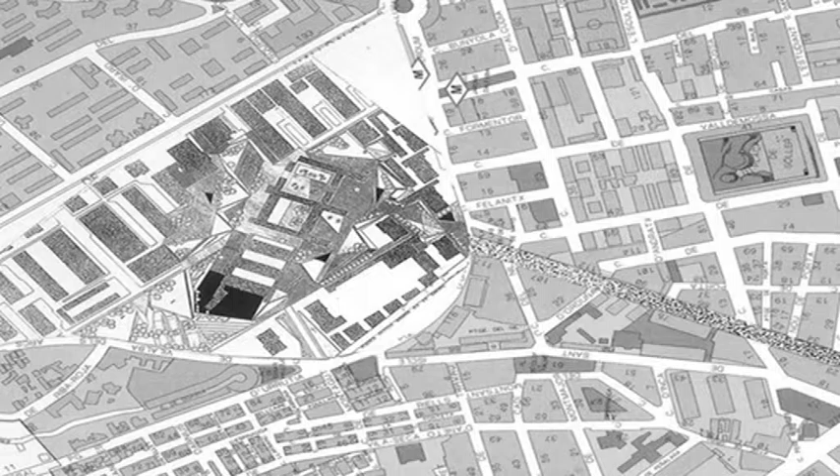So we are here. This is the Parc Central de Nou Barris, but there was an attempt of decentralization of the city. In the middle 80s, there was an interest in decentralizing the city into the neighborhoods. So they put the municipality of Nou Barris in this area, in an old psychiatric hospital that was here, in the middle of nowhere. And the intention was to create a civic center around the psychiatric hospital and put the municipal buildings, the services, the technical services, the main library, and amenities and housing around.

And then this was the Plaza Virrey Amat, that was the main plaza, where the roundabout, the metros, and the buses were. So there was an attempt of creating a center, Nou Barris Central, within the whole area of nine neighborhoods.

This was the main plaza that we also did within the competition. And these are a main plaza that tend to be more symbolic, and we made together this element.

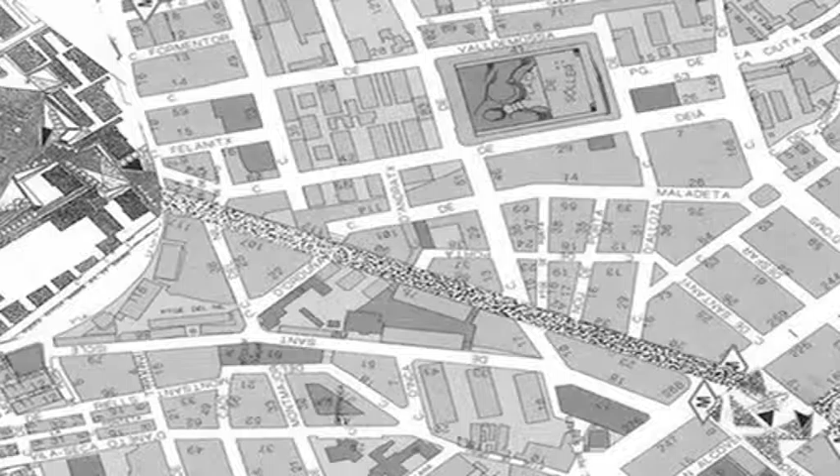But the connection to the north is like 700 meters, and the intention was to connect this plaza to the main area there. Only 700 meters, but completely disconnected, because there was nothing there. So these elements that we call palmas, diapason, tuning forks and palms, were placed in the plaza and in the other area to remind you, to recall you that there was something to go there.

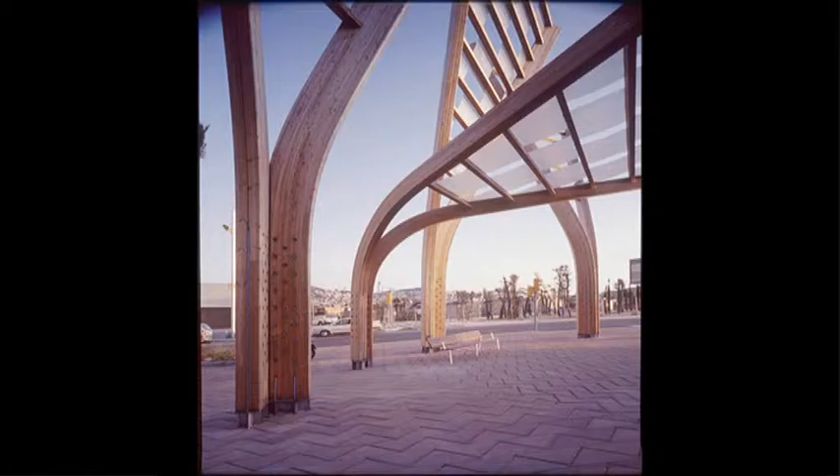And the technical services of the neighborhood arranged this. So these same signs are at the top of the Parc Central de Nou Barris, where the roundabout is.

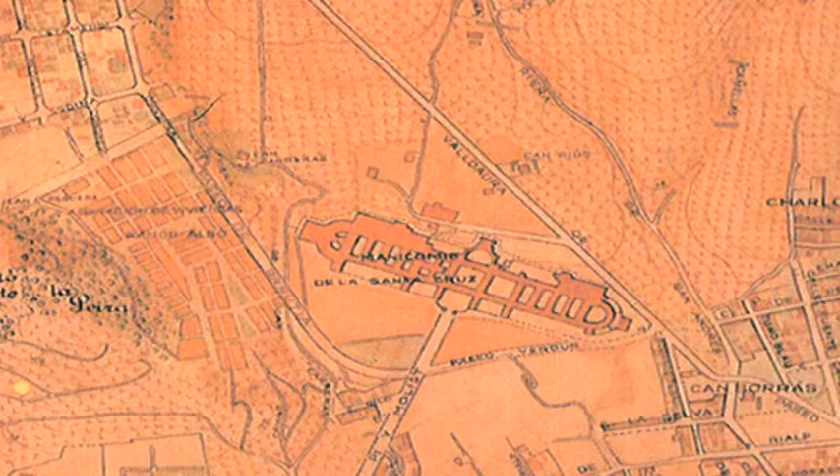This was a 1929 plan where you see the psychiatric building, like 500 meters of length by 100 meters of width, connected with the Plaza Virrey Amat with the main neoclassical arcs. And this is the Ronda and the Carrer Valldaura. So these were the lands around the psychiatric hospital, vineyards all over, not a lot of trees, and the main streets.

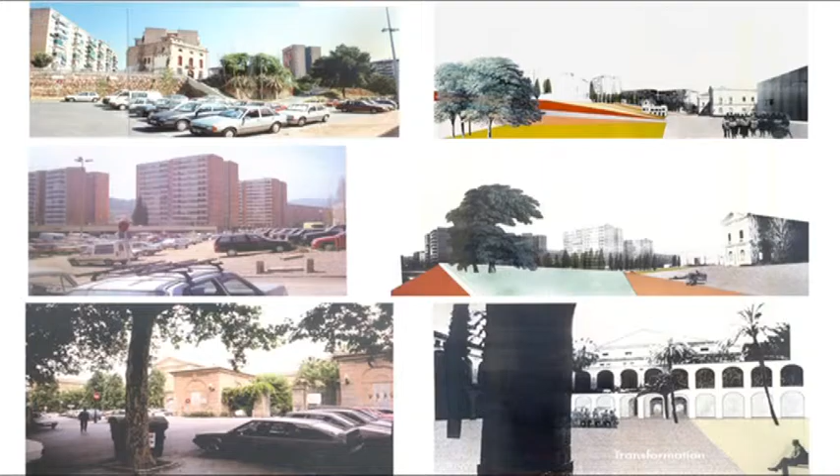This is the existing situation, and we were proposing to the team of that new municipality how these walls could be transformed into slopes, how these big buildings with parking lots around could have the parking placed down the street, and enlarge this plaza around the building. And how the main access to the city center could be put at level, in order to demolish these several courtyards that were hiding the building from the street, making an opening through the courtyard inside and a connection from one part to the other. So connection, connection, connection, putting at level relationship between buildings and plazas.

And why don't you speak? Do you want to speak about that?

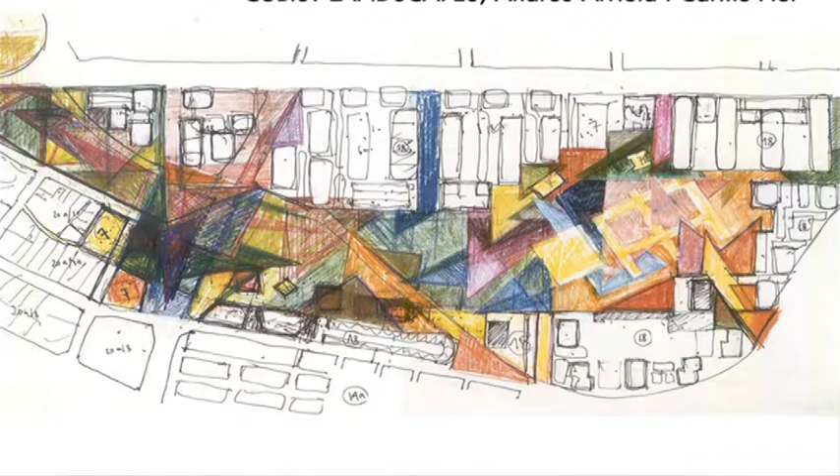Everything was the same. So we tried to do in our area, with these buildings and the open space, to treat them in the same way, because the shadows of the buildings were on top of the open space, and there was a lot of triangularization between the property of the blocks of residential housing and the exterior. So we had this idea, but not formally copying a painting, but conceptualizing the idea of using the triangle to adapt the smallest parts of the plan and make them together into a new area, a new landscape, let's say.

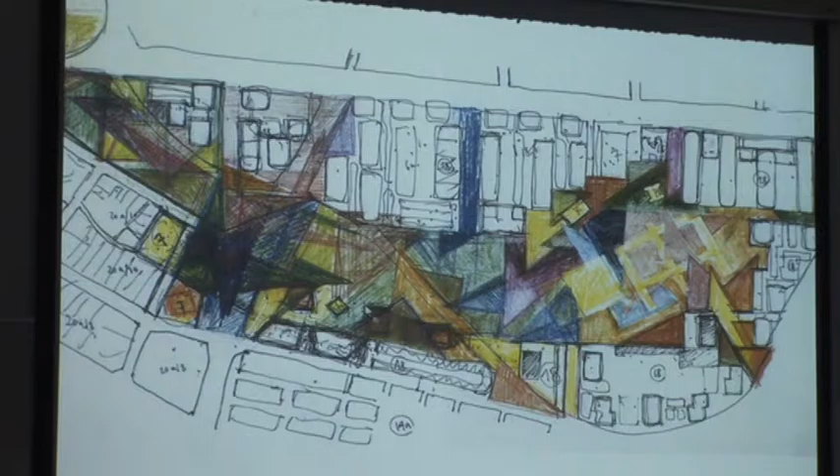And as here there was the main umbilical connection to the Plaza Virrey Amat, we tried to open a lot of different perspectives. So we tried to connect this inner part that was like inside of a castle with a big wall made by the residential buildings. We tried to open all these elements, all these streets, and have different visions of this landscape.

So here we had, you see, the remnant of the hospital and all these elements, and we tried to cut through and go upstairs.

Well, this also shows the position of the different amenities, because it was proposed to put a library here in the open space. We said no, it's better to place it up there. So in the beginning, it was just a question of tearing down parts of the main psychiatric building in order to put a plaza in front of the building.

And we produced a scheme that told the people in that area that even if you were doing some work, it would be non-crucial if you were not connecting all this space to the main area of the city where the new belt was, because you would always be marginal inside of a neighborhood, not explaining what is there, not facing the urban situation.

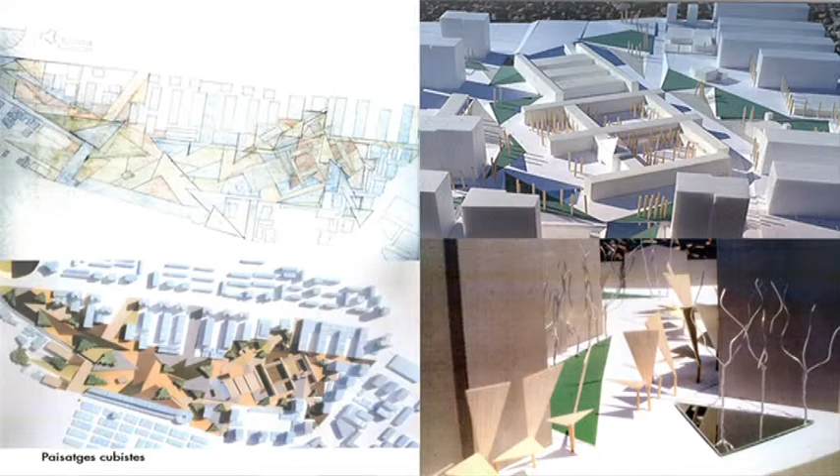So we tried that this kind of pavement, the pavement you would see there, is also a piece of triangle. We decided to use different colors of terrain, of ground, and make a differentiation of these triangles also within the pavement, because we had to put pavement apart from grass. And we studied how to do it three-dimensionally, to put this cubist landscape three-dimensionally and use it in urban design, how to treat all these elements.

From that, drawings, building models, and also trying to open this neoclassical street that was leading to the main plaza, to open it into different plazas and opening the trees, forming this plaza.

This is the main courtyard that was opened at level. Before there was like a neoclassical building, with stairs and closed off. We put it at level and we opened these areas.

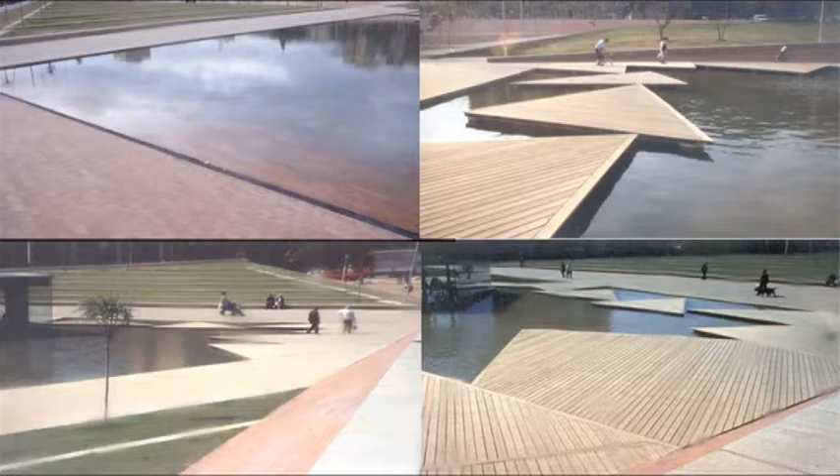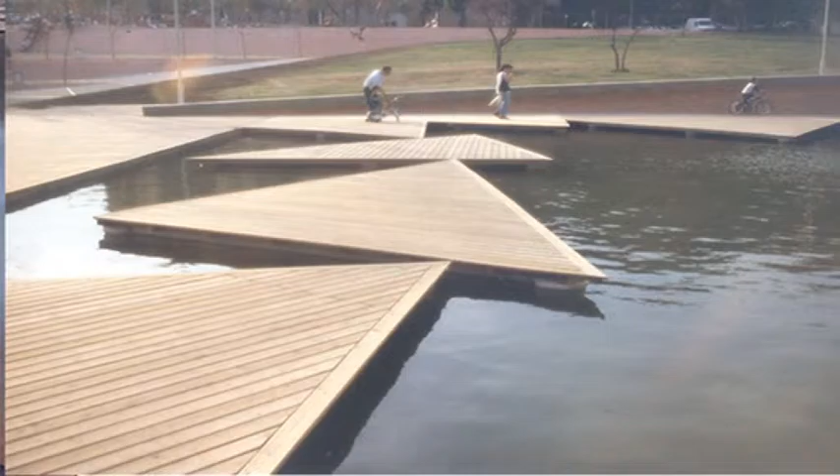This was the first phase of the park. Since municipality elections are every 4 years, the first municipal council did the first part of the park, which opened in 1999 or 2000. This is the first part.

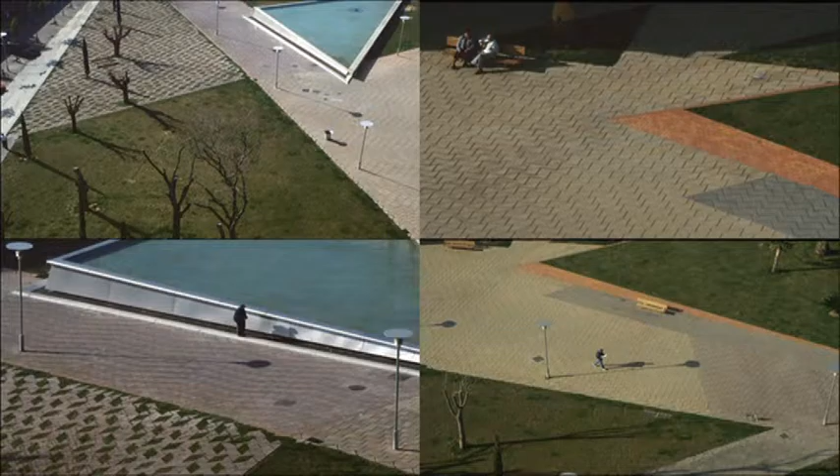In fact, it is a plaza, extending the plaza around the psychiatric building and leveling it. You see a lot of triangles here because it's a composition, but the scale is quite big. I've been there, and it's quite nice because it's a grand scale - a 16 hectare park.

The buildings around are high, so this kind of detailing doesn't seem like over-design. But this is to show you that from the small detail to the water elements, we were using the same kind of design, triangular shape.

In order not to lose this concept from the general idea of cubist landscape down to the detail, you had to keep very straight to a kind of language to cope with different phases, and also with the expropriation of housing, transforming different parts of the park.

This is part of the first area - the water. This area had been inhabited mostly by Andalusians, and there are a lot of fountains, Granada fountains, Arab fountains, and all that. So they asked us to put some fountains.

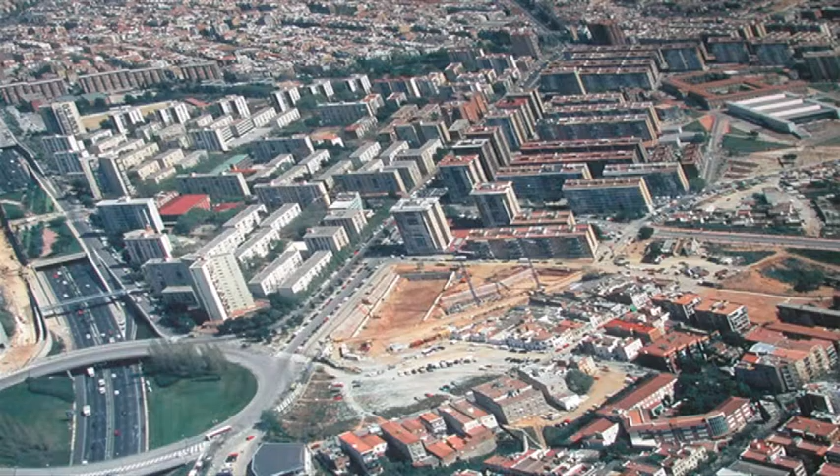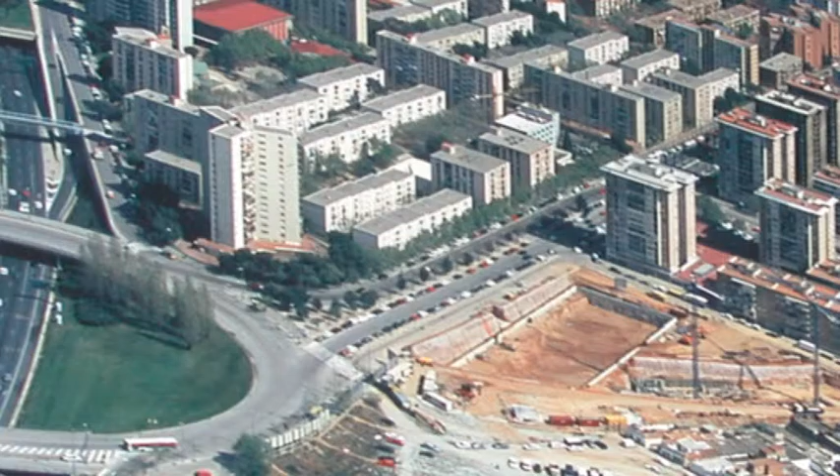This is the belt, already done in '92, and the new housing that was being built. You see how the scheme had to cope with the demolition of these buildings in the middle, because they were planned and fixed in the master plan as a park.

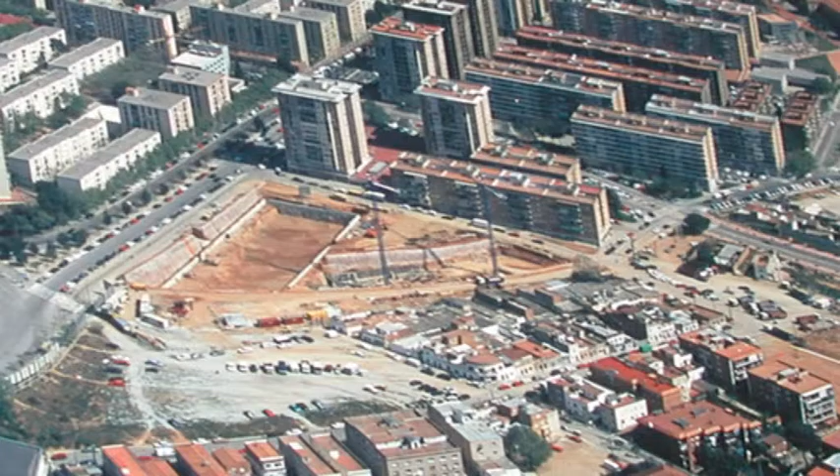The first phase of the park's idea was very triangular, because we had to connect a 7 meter difference in level, widening the space around the building. In the second part of the park, this big building was placed at 120 meters above sea level on a neoclassical platform, but the other part of the park was steep, with a 40 meter level difference.

So we had to invent a flexibilization of the triangle in order to wind and connect with the mountains and hills that were there. The space was also a little less, so we tried using scissors to make two different levels, putting more at grade with the housing in front - the triangular space of land - with a slope around 4% to be used as a flat area, like a garden, connected with this.

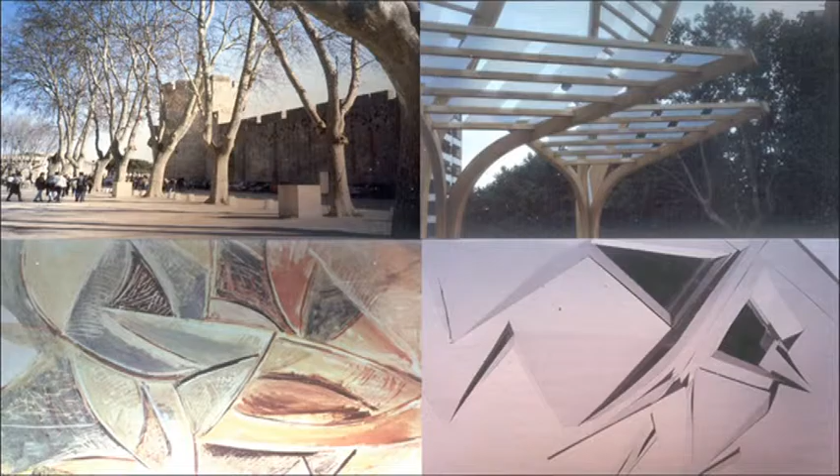So this is the inspiration of the palms and tuning forks. This is Aigües Mortes in the south of France, in Catalan, Aigües Mortes. And also this model that we were building for the next part of the park, the one that winds up until the hills.

I think paintings inspire you a lot, because artists are devoted to experiencing all these kinds of shapes connecting with sensation. So as architects or landscape architects, we have to cope with a lot of different things, functions and other things. So we don't have time to do that, so we take their investigations in order to use them in our 3-dimensional landscapes.

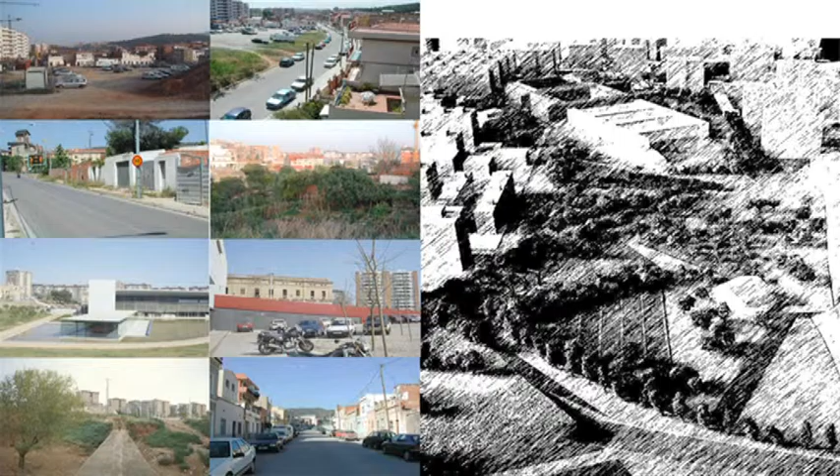So you see before and after, so what was segmentation, what is fragmentation, what are walls are transformed into slopes, in order to make this connection more fluent.

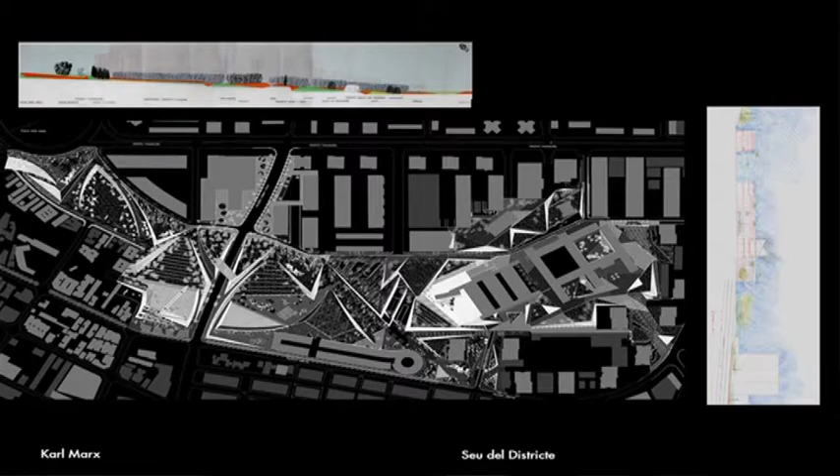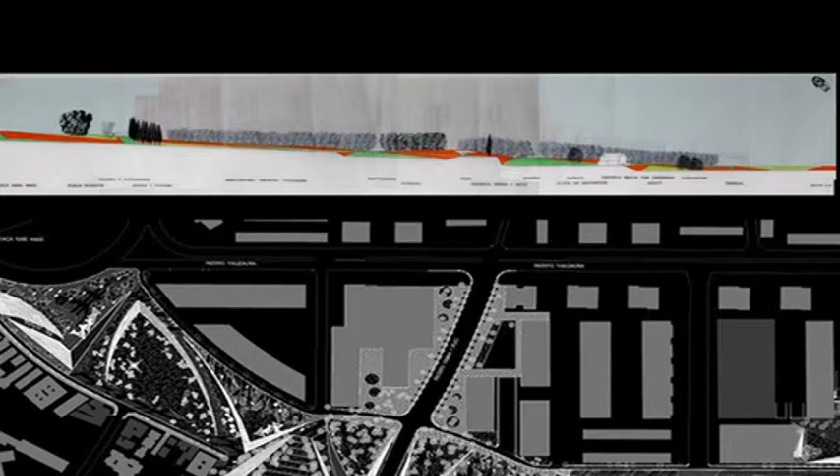You see here the cross-section, this urban axis. The idea was - these are drawings from Andreu, the ones before were mine - but this is this cut through the building in order to put at level and connect this axis. And the other one is the difference of levels and how to connect them.

We were saying topographical. I think topography is the most important thing in order to achieve this connectivity and put things at hand. So we studied carefully this topography, and also in order to see that the slope here is less than here.

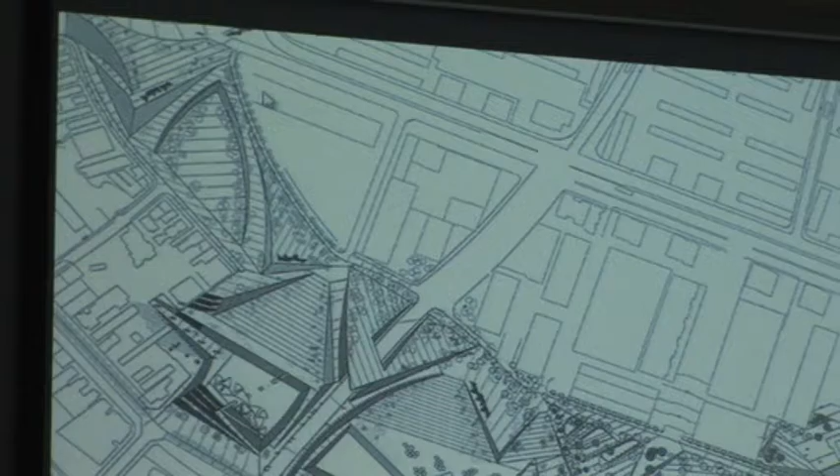And we were trying to use these slopes to make a plaza, a green area that faces these houses here. We put there, at the level of the roundabout, a plaza, because there wasn't one there. There was just a big slope facing this street. You would see later how to connect that from there.

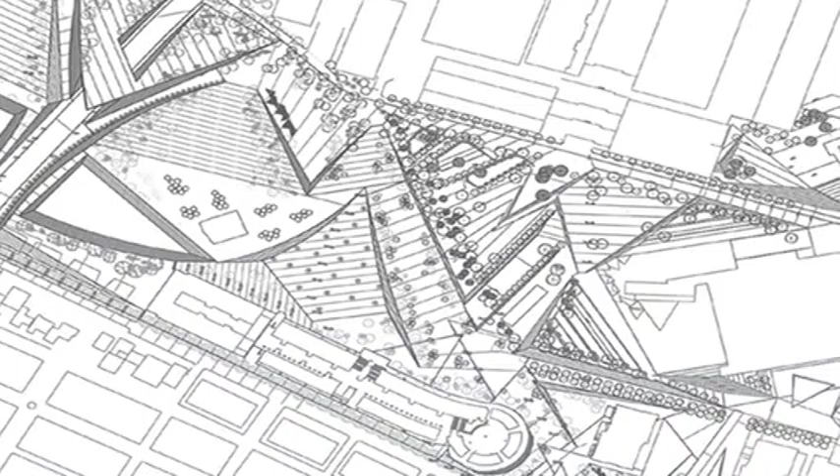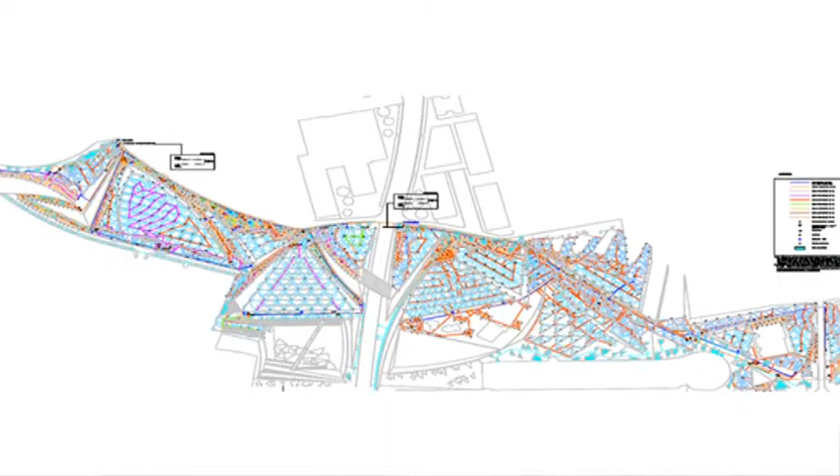So you see the organization of these triangles. I put that because this is the irrigation system of the whole area, of all these trees, bushes, and all that. I don't know how they put in all this kind of irrigation, but we were supposed to put that. And the areas - well, we don't see here because it enlarges a lot - but here there is an entrance from the city lake. These triangles of water are there.

And from the first phase of the park, you had this area. In the second phase of the park, we transformed this street into a rambla. This is the second part.

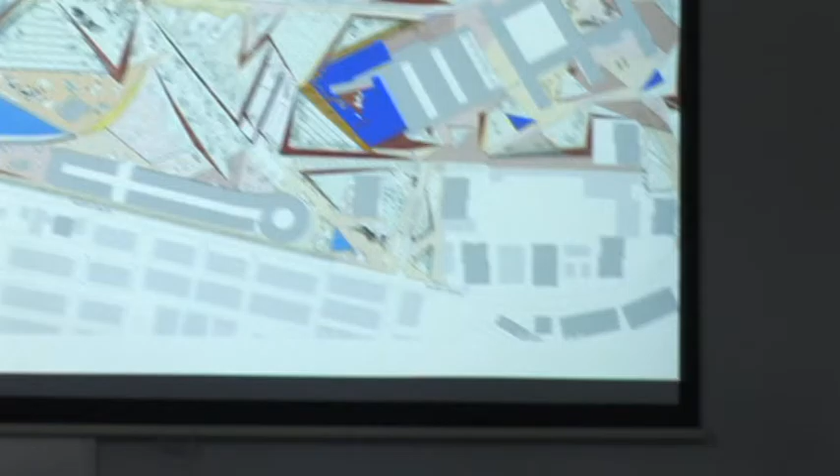Between one phase and the other, the politicians - we were discussing how to cross. This was a new street that would cross the park in half. We didn't want this street to cut the park in half because this idea of connecting this part to the roundabout and the motorway was important, in order not to be marginal and inside.

So we had been planning different ways of overpassing this element, a bridge or no bridge. But at the end, they hired an engineer, and he said, let's put a slope and a tube, and that's it. So this torrent that was there was completely cut, and we found this big barrier.

So we organized, with this idea of water, a lake on either side of this new street, and because of that you would see some play with fountains and elements trying to give memory of this element.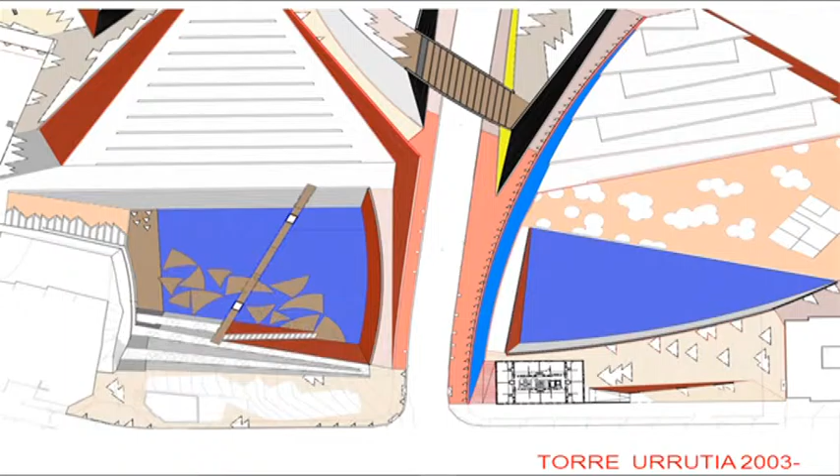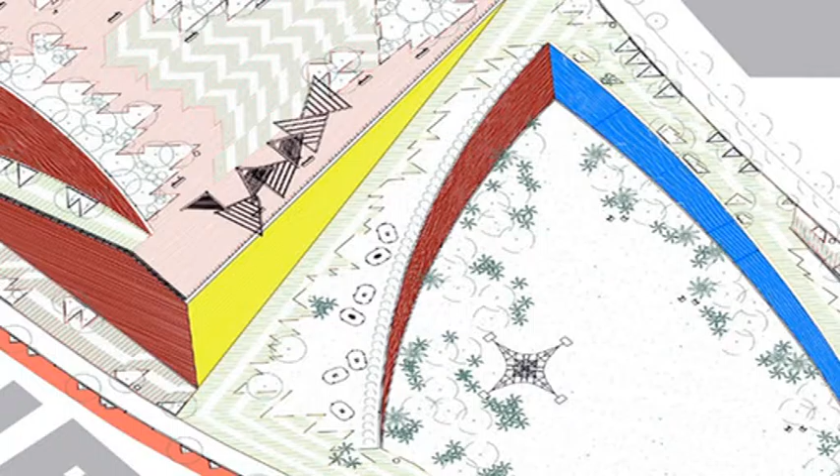The idea of the vegetation - this is a plaza about 100 meters, this is a slope, this is green, like an amphitheater. In every one of these plazas, the vegetation is different and is formed by two kinds of trees: one that is high because of the scale and is evergreen, and the other that contrasts with color and is not evergreen. It depends on the area.

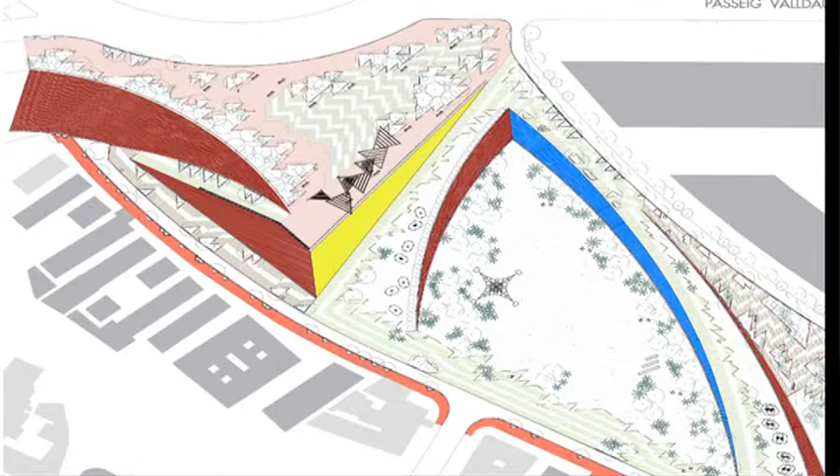It changes, there are a lot of different elements. You see there are three here, 3 olive trees. I placed 3 because, you know, after all this kind of urbanization, what happens is there is no money for plants - it has happened to me before. And I said, but if this is a park, why is there no money for plants? So I put a lot of them in so that, here we just have one olive tree now, but there are 3, okay? And all this kind of elements.

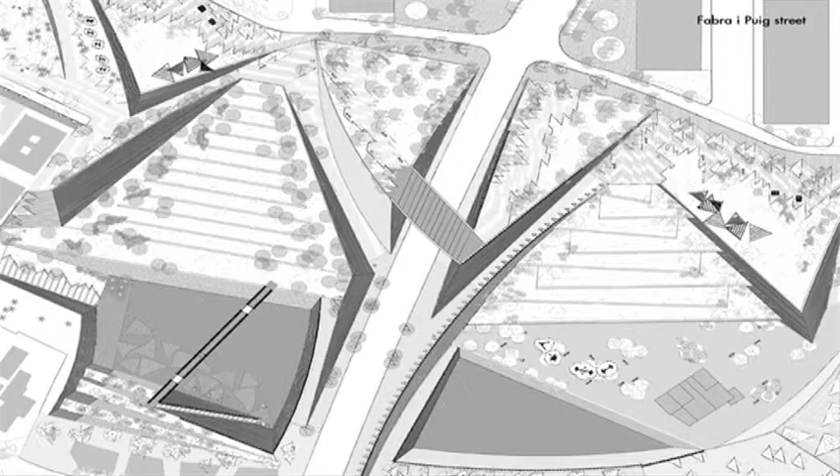These elements - there are interesting things, for example, because of the water systems and pump systems, we arranged falling water with 3 cascades there. But in the middle of the licitation of the project, they said, well, just one falling water. The water system and the street that passes by here, because as Carmen was saying, that was a long discussion on how to cross the park with this new street, because it was an important connection in terms of traffic.

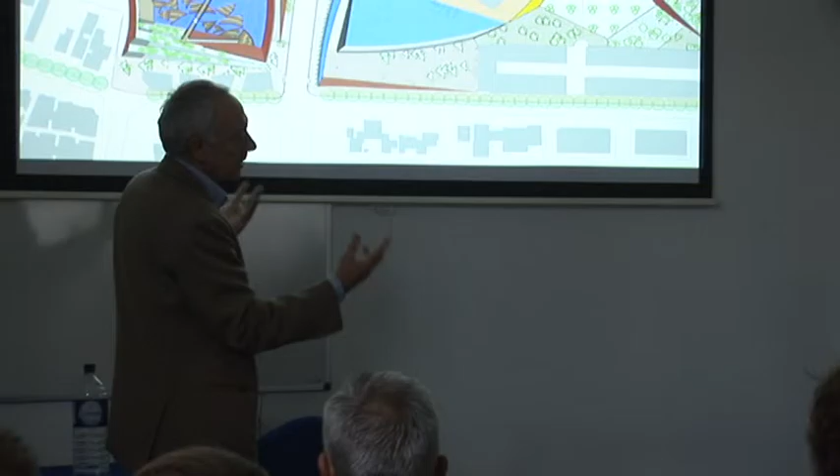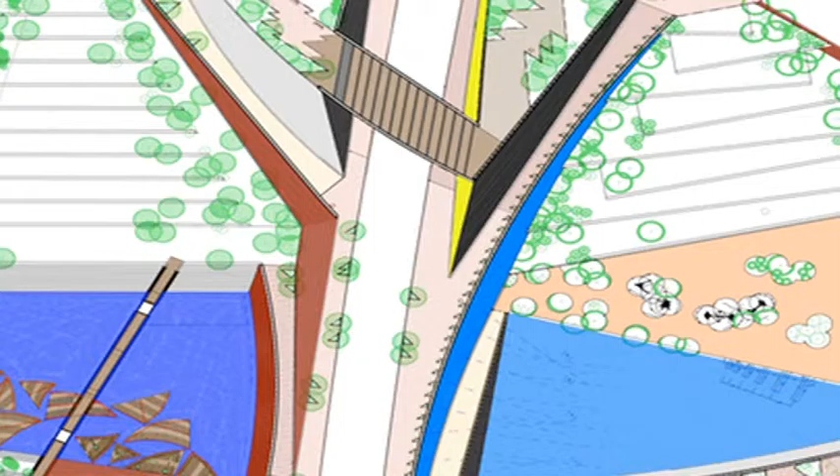We were playing with the idea of making a tunnel or a bridge, a bit like in Central Park, how it treats the street that crosses the park. After discussion, and because of the budget we had, which was a strong issue, this original idea can be a little read, but still there is that bridge, not as big as intended, and the idea of the park passing under the street was kept, with water on both sides. In fact, this is true because...

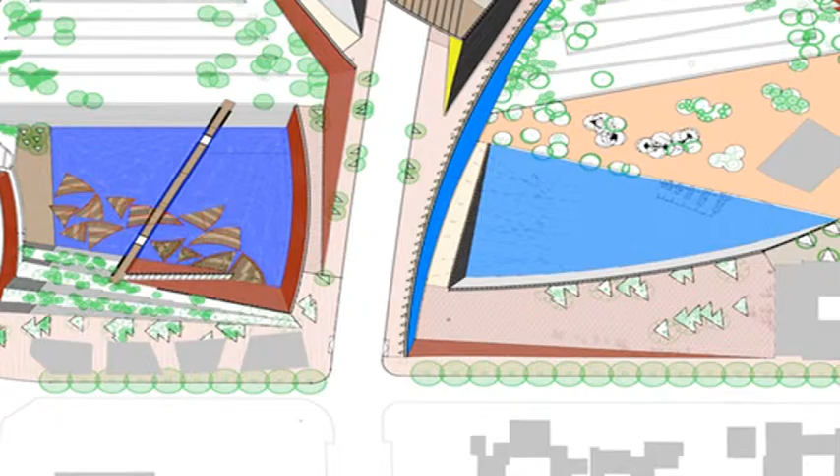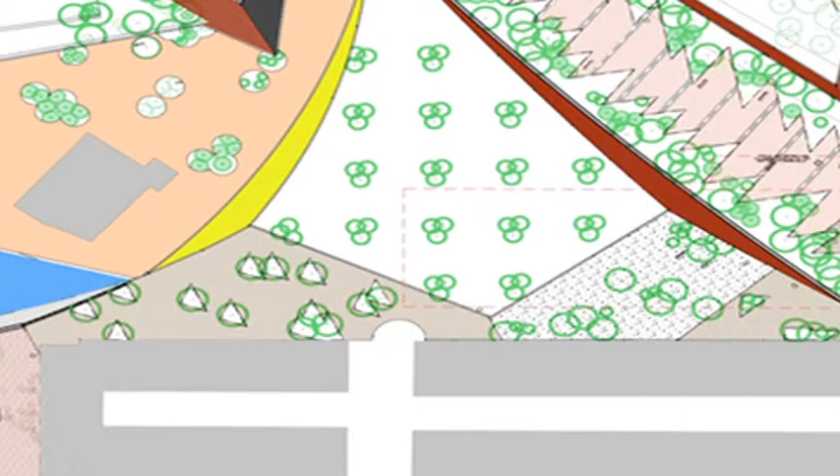Originally in that part there was an ancient stream, a gully running from the Sierra de Collserola down the city. We keep that memory, with water on both sides, reinforcing the idea that the park passes underneath. This tremendous complex irrigation system is fed by phreatic water which goes by the same stream, kept in this dotted line. This is a buried reservoir, a tank collecting this phreatic water, which feeds the irrigation of the park, and is also part of a system in Barcelona, because the rains are extremely seasonal, meaning it rains a lot on few occasions, and the sewer system doesn't have enough capacity for these peaks. So the solution is to have several reservoirs, tanks, to hold the water when it comes. This was installed in the park as part of the irrigation system.

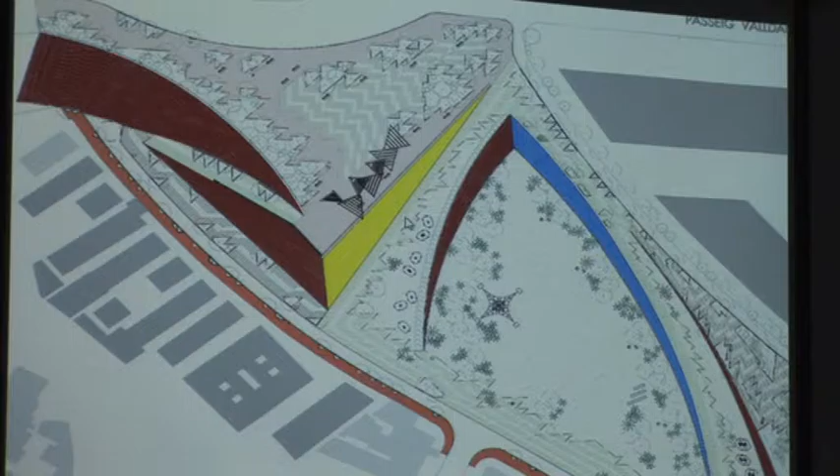I'm just showing photographs. The placing of these elements, the poles and tuning forks in the upper part you see here - there are like 7, and then they became 3. This idea that when the politician and the technician are cutting, you have something to rely on.

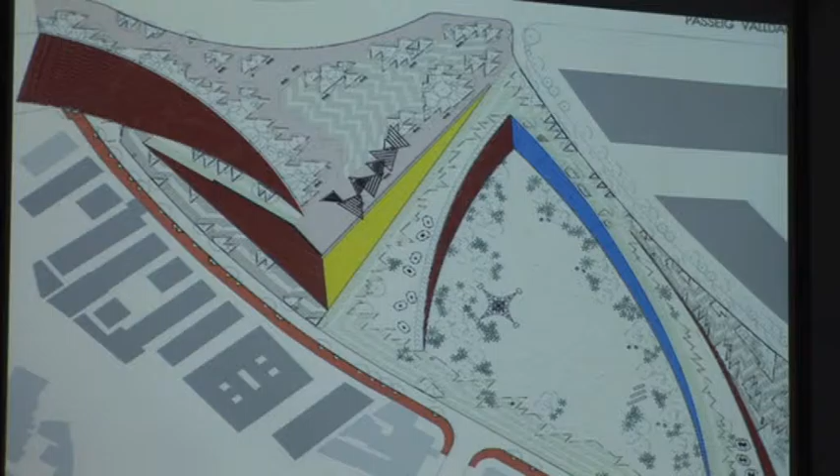For example, there were different possibilities of paving it or not, or how to pave, so you would see different drawings of the big scale trees here, and this was meant to be just a parterre. But in fact, what we had to do was make it more simple, because the possibility of inserting greenery inside the triangle is difficult to maintain for a public park. So we decided whether to pave or not pave. But you see the scale of these elements compared with the housing.

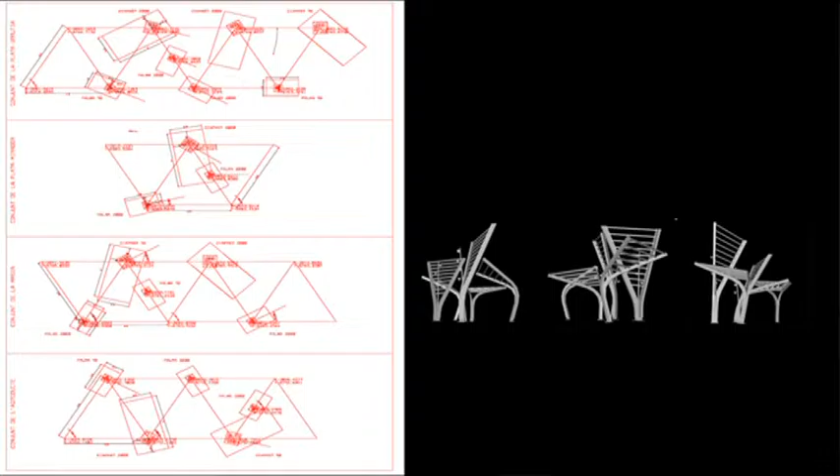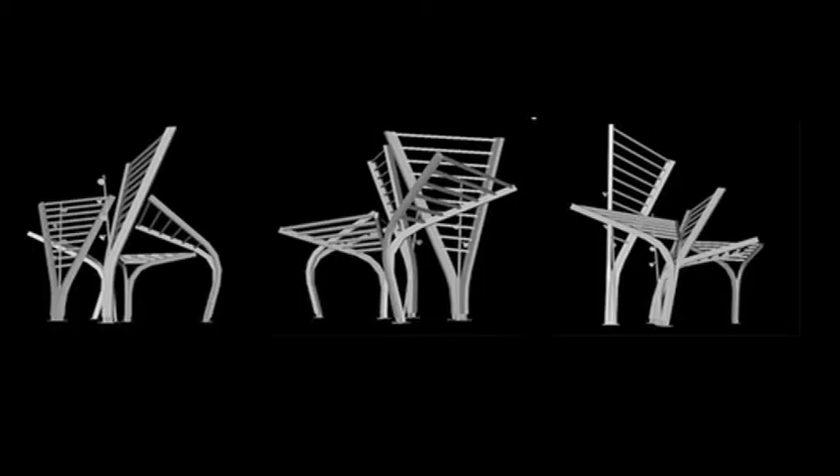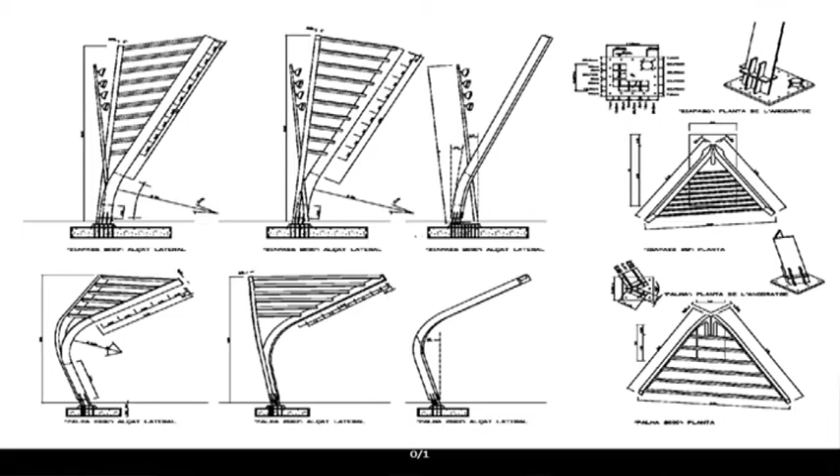This kind of variety is always set in a pattern system in order to control the variety. You see these tuning forks and their construction, how in the first area they are vertical, orthogonal to the soil, more related to the neoclassical language of the building, and in the upper parts they return a little, becoming oblique to the soil. The slopes are always 1 to 2, and they are in thick brick in order to be more related to the soil. Then, as we'll see, these elements are prefabricated concrete.

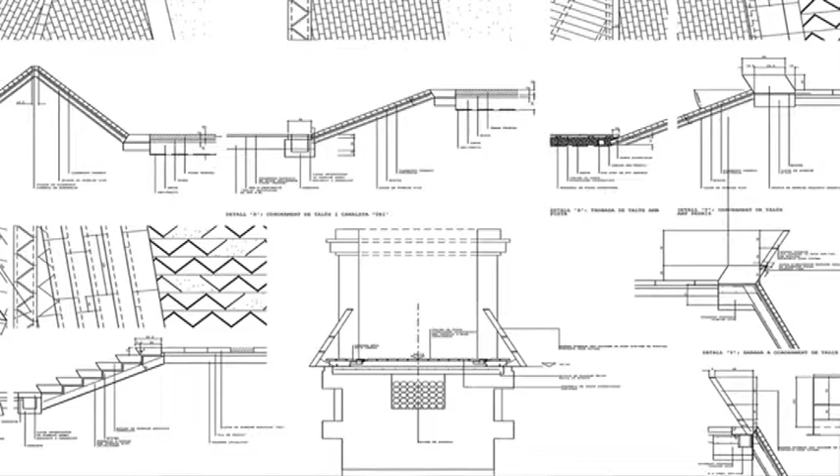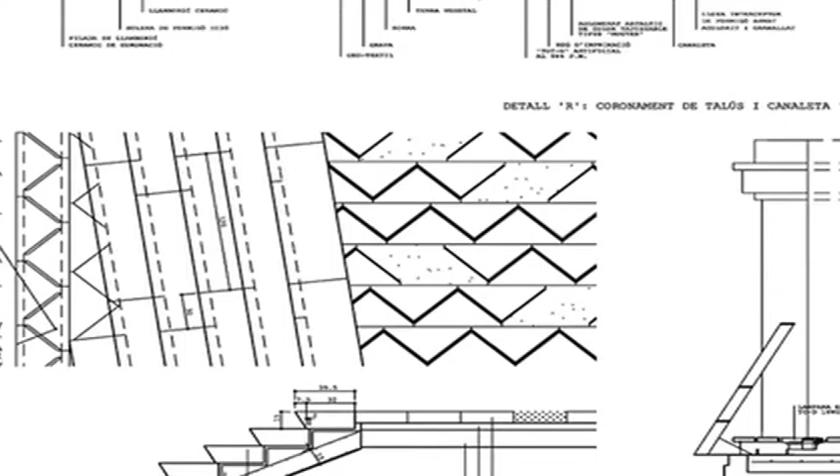This is the aqueduct with the curtain fence or railing. You see the elements of the pavement, the triangular elements placed in lines, and they are different. There is a repetition of 7 rows so that it looks like they are different, expressing this dynamicity as you're moving through. They are not always the same.

The same section of concrete is used for the stairs. This is the drainage system, which I don't think works very well, but it's not bad. You have this, and then in order to maintain the same kind of element, the triangle, you see how they created the top. I think it's quite well maintained.

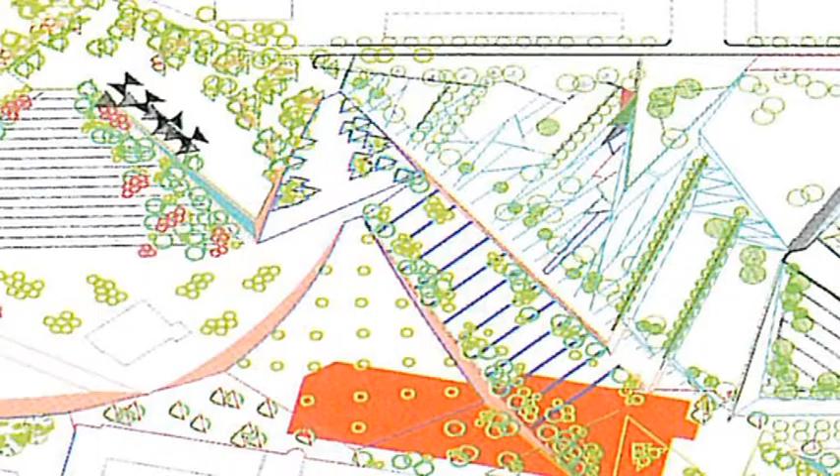Andreu was showing the position of this reservoir. You see it here, and here you can see the multiplicity of poles and tuning forks - in fact there are 5, or 3. And you see here are the bushes, I don't remember now which one I placed. And here the trees, also completed more than before - you see, they are full. They look like they're in the reservoir.

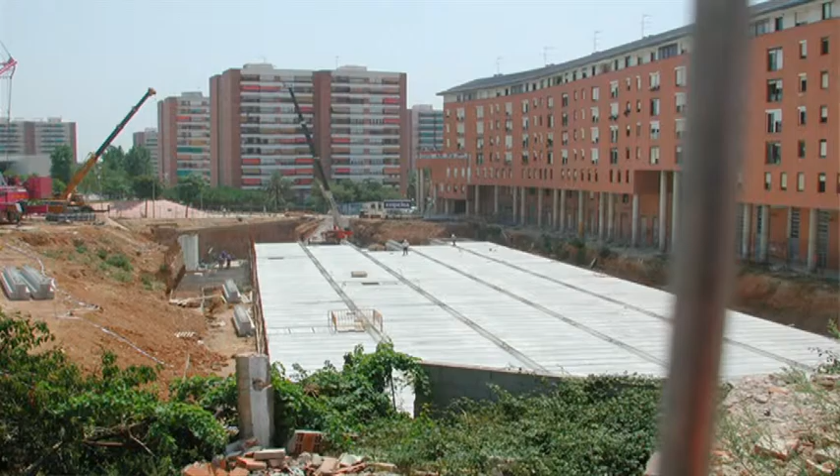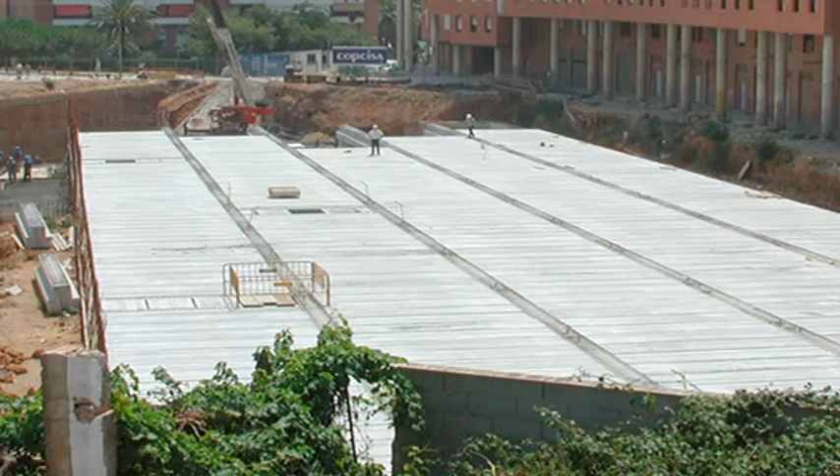Now that I see these photographs, I'm thinking, how can this be built? Because this is like a peel of the element, and it was all cut for a reservoir. You would see the different things. These buildings were existing, this long building.

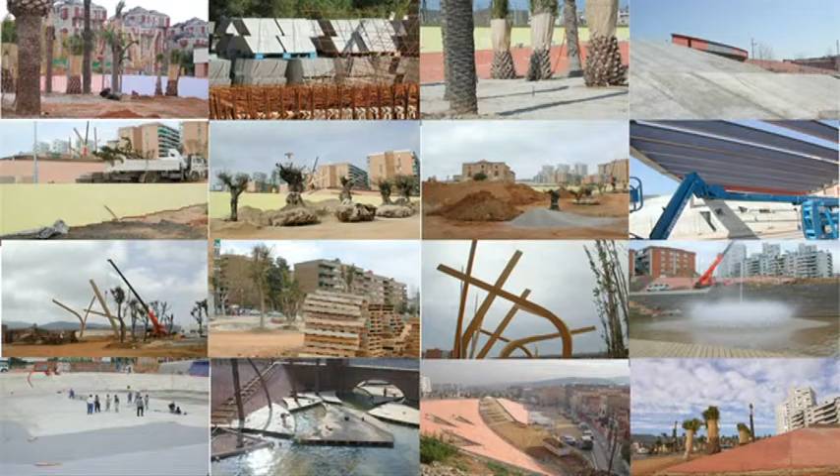We love construction, so we were taking photos of these elements that I was showing. These are small ones - I think you'd see them better this way.

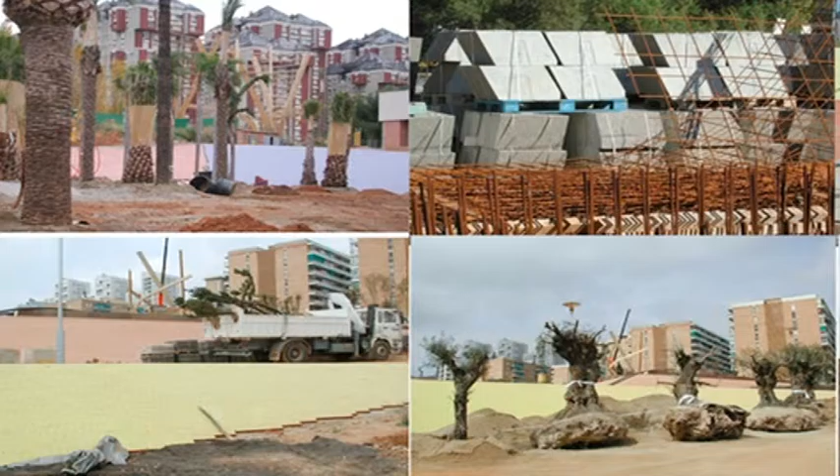It's incredible how these firms were doing landscape as if they were doing sewage work. We were very ashamed because one of the topographers made the layout carelessly, and we couldn't change things because curves had moved 3 meters on site.

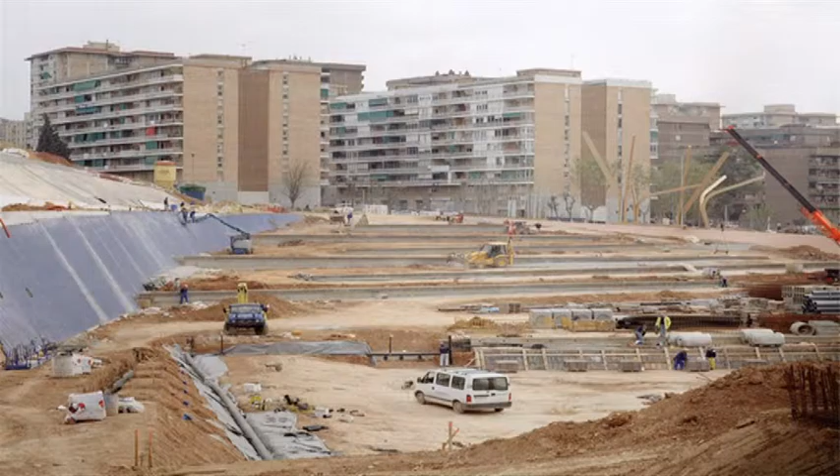You see the palms and tuning forks here beginning to be placed, already placed, and I was fearing for the wood.

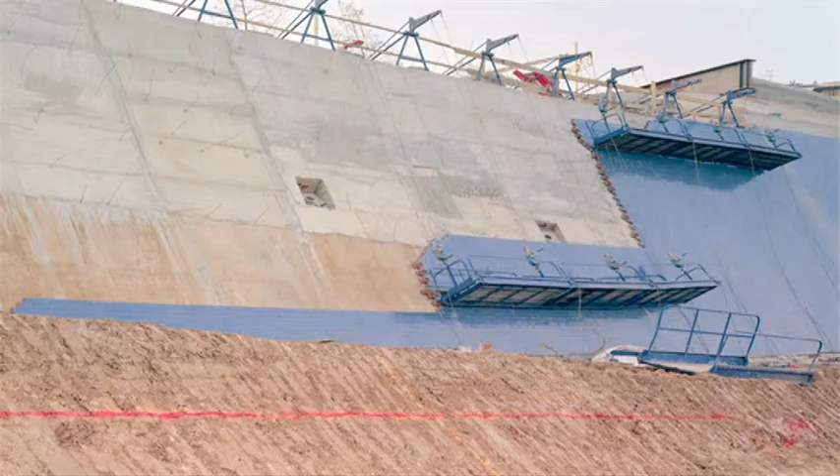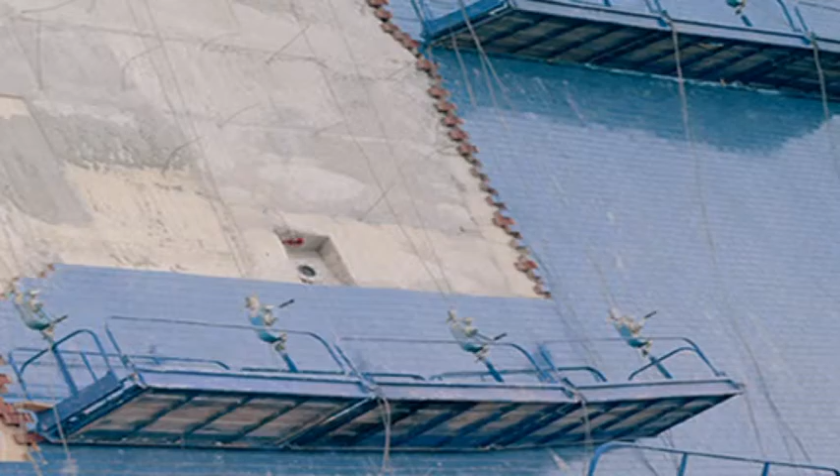This is the amphitheater. We don't normally want to decorate concrete, but in this case we thought concrete wouldn't be welcome in this area because it would need painting. So we decided to use ceramic, a little like Picasso with color, to make this landscape more visible.

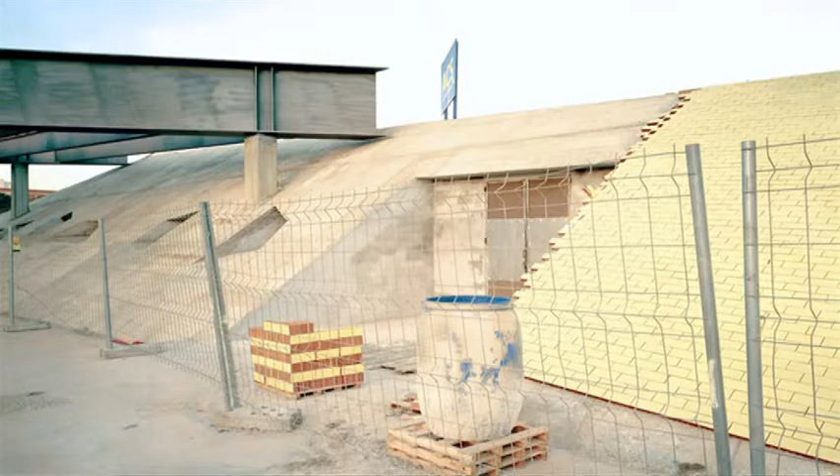So you see the materials, these bricks - this is the under-bridge area. I was hiding here because this column shouldn't have been here - the length of this beam was bad, so we had to remove it.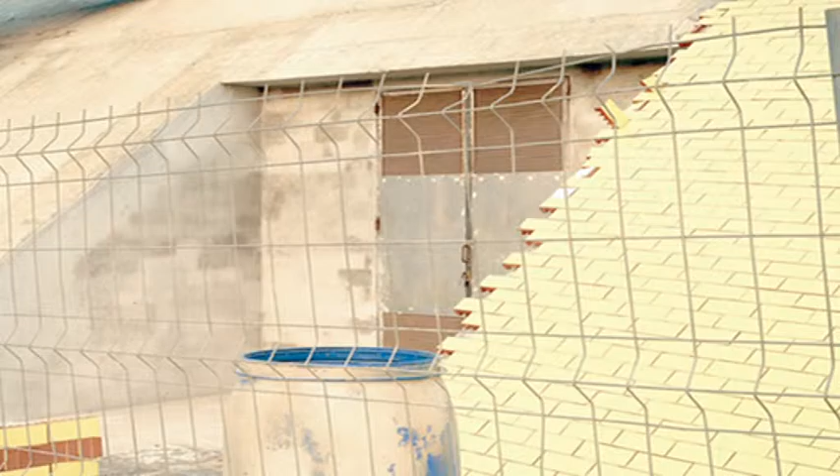And this is the underpass with the services for the gardeners, for the electrical services and all that. You saw that before - these are the olive trees.

In that area I showed you, I put 3 instead of 1. We wanted olive trees coming from Tarragona because they were beautiful, but I don't know how the work organization went - they ended up coming from Italy.

You see the lamps that we designed over a lot of years, in the middle of all that - it was terrible. And this is the housing that was in this area too.

It was already inhabited, still inhabited, so we had to keep it here - we liked it. You see also the construction.

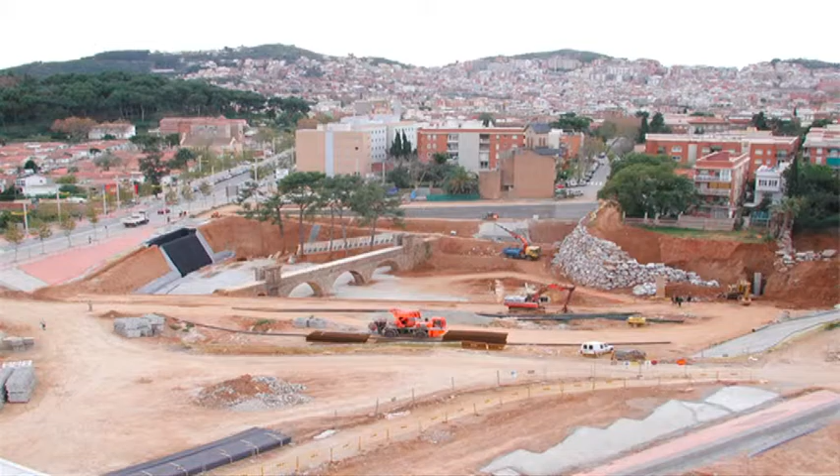Meanwhile, there was a person fighting to get his parcel bigger, with someone in the municipality helping him. I don't know why, but they were putting this terrible wall along the parcel. You see these trees were there - we maintained them.

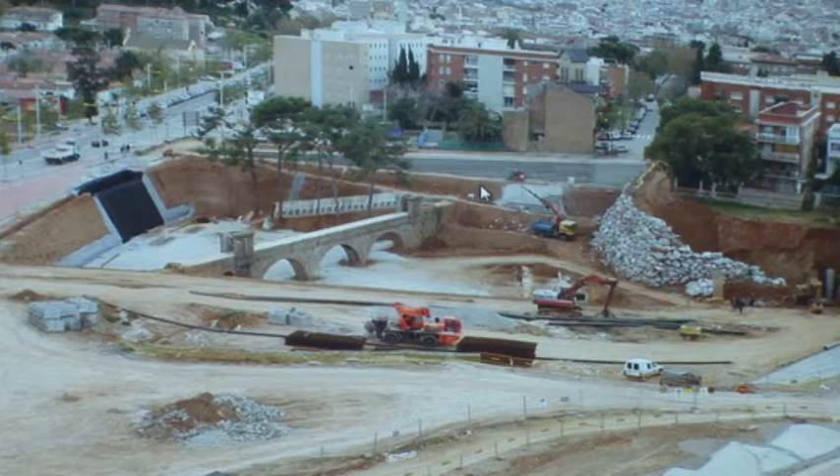You see this is the cascade, the falling water, with the impermeabilization of the brick there. The new path recovered part of the old aqueduct that was bringing water to the city. Well, this is the lake.

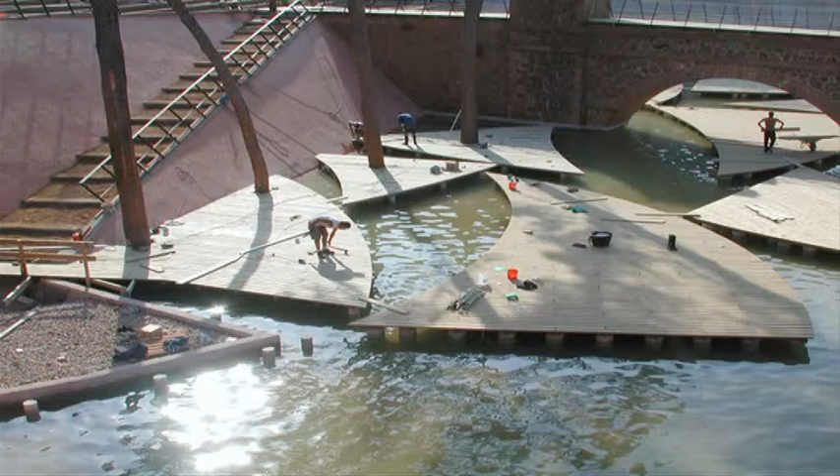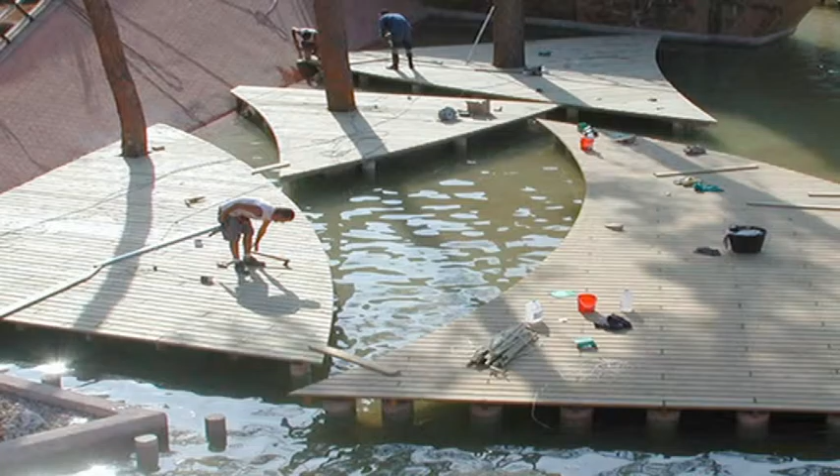And you see the trees - this is the construction of what we call Sydney Lake. In the first part, they are all triangles, and this time we tried to be more gentle. I see that this is very thin now.

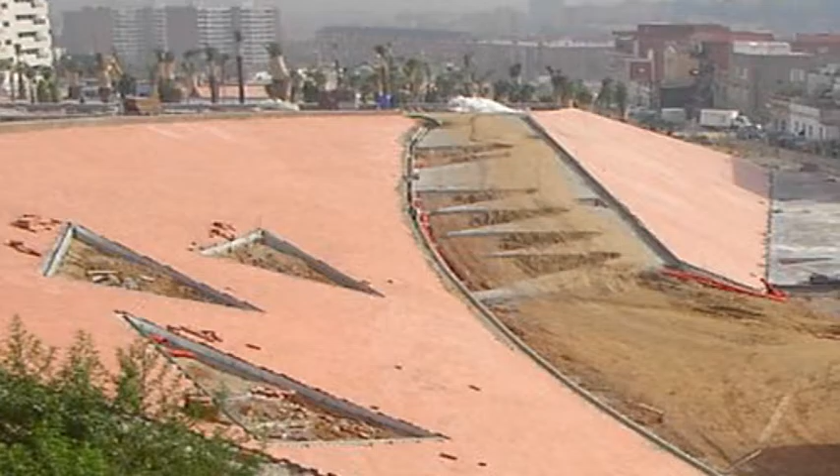About construction, here is the roundabout, Karl Marx roundabout, Karl Marx Plaza. So we made another plaza connecting the roundabout, turning it into a plaza rather than a roundabout, and people were very frightened about this.

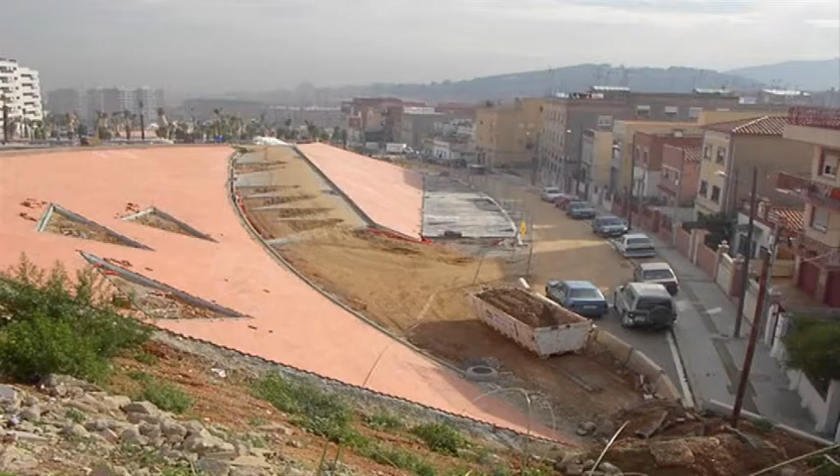Because people could argue against this slope, but it was solved - nobody made a problem of it. In the first part of the park, we tried to explain that the main street had centennial maple trees, and we wanted to open them up to make several plazas. All the neighborhood was against it - there were big signs saying we have these centennial trees and they want to cut them off.

So we said, okay, we're going to connect the private spaces of those buildings through the soil, keeping the trees in the same place. After that, everything went well, because no public work had been done in that area before, so the neighborhood association was very frightened about what the municipality was going to do.

So this is the plaza. These elements, we wanted to put some trees there, but it was impossible, I don't know why, within the houses. No parking or so... ah, there is a parking. I tried to put it, but nobody did. But now it seems that it's cool like that.

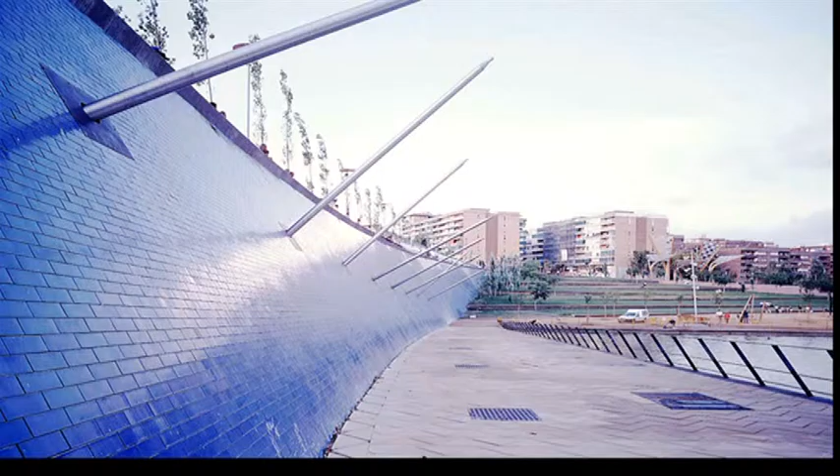These are the pipes. We copied that from the ski resorts, when you go to a ski resort and there is no snow. In the mountains of the Pyrenees, it normally happens, so you need this to drain the snow. So we thought this could be a good thing to drain the snow, and the water.

This amphitheater wanted to be more gentle than the other one, like being a ramp and also walking like that. This would have to be restored. Now it's just empty, waiting for renovation.

The first new housing that you have been seeing. You don't see that now, these trees are like that - I mean, they are big, okay.

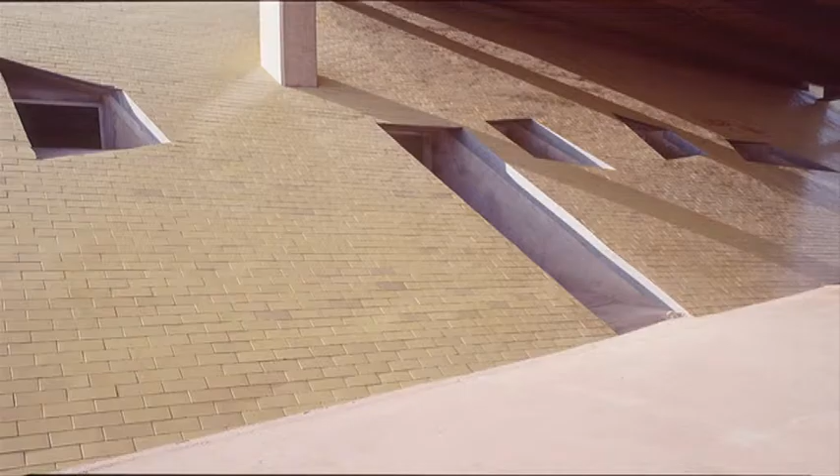This is the path under the bridge with the services for the park. You see that bridge, it's like 15 meters wide.

We wanted the whole platform to be a connection, like the park bridging there, but they were afraid that the marginality of this area could be hidden under this bridge.

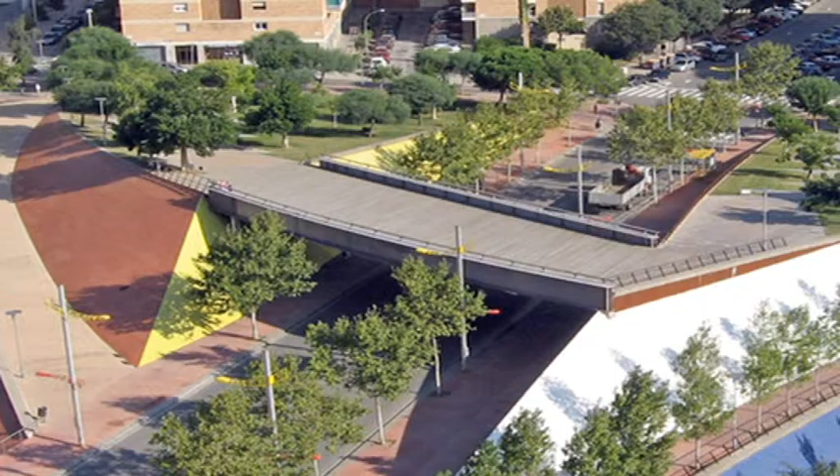So what is important is that down there are parkings, and all these paths of the park connect with streets in the neighborhood. So it's the garden from the neighborhood. You connect from these two levels.

Also, this transforms into a path, I'm not sure why it's so red. And you can go down and also connect through these side platforms to another place.

You see all this because it was supposed to have a big cascade, a big waterfall, all the wall, but they stopped. So you have a big room underneath for doing rave parties, because no homes are there.

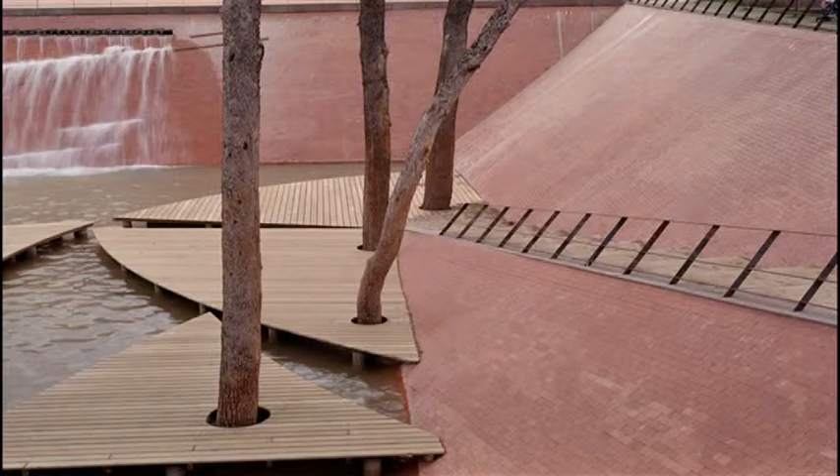You see, you go down. We wanted it to be very earthy, so these slopes are just with brick.